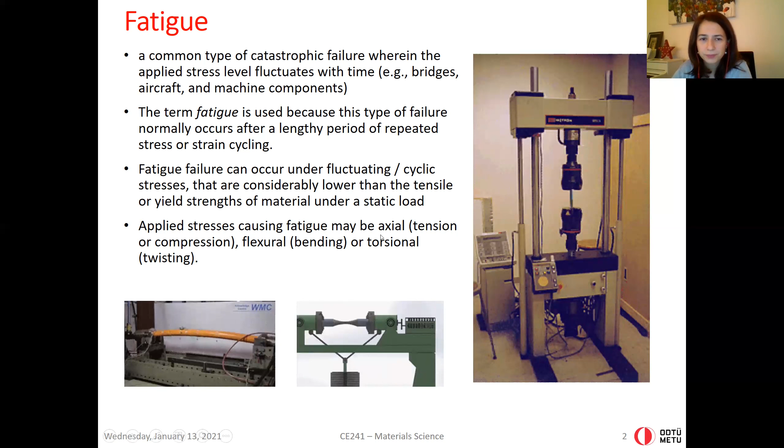The nature of fatigue failure is also very important. Fatigue failure is actually brittle-like; relatively little plastic deformation occurs, even in normally ductile materials. This means sudden and catastrophic failure, which is something we for sure don't want in civil engineering structures. It causes 90% of all failures of metallic structures. Polymers and ceramics, except for glasses, are also susceptible to this type of failure.

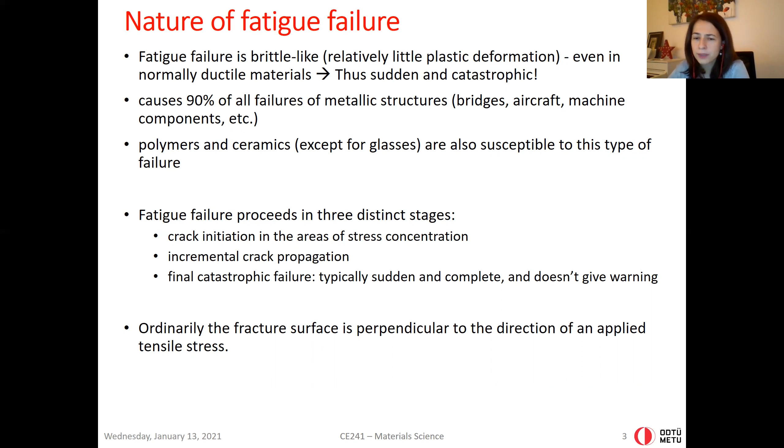Fatigue failure proceeds in three distinct stages. The first stage is crack initiation in the areas of stress concentration. The second stage is propagation of this crack. The final stage is catastrophic failure, which is sudden and complete and gives no warning. Ordinarily, the fracture surface is perpendicular to the direction of the applied tensile stress.

And random stress is the last one. Basically, it is just random.

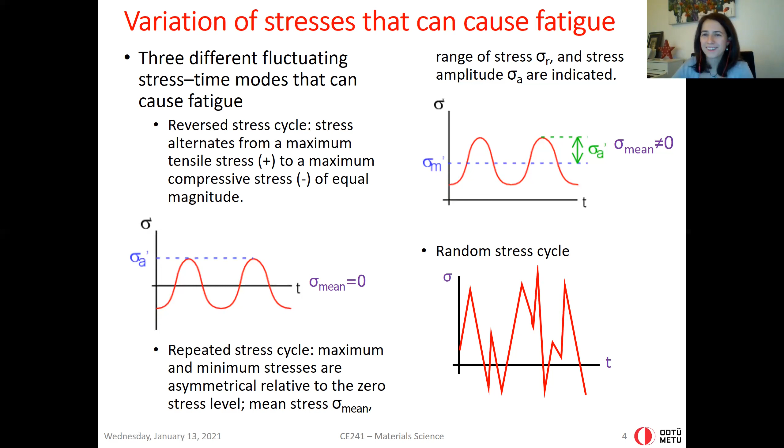When we talk about cyclic stresses, repeated stress and reverse stress, the main difference is the mean. Cyclic stresses can be characterized by maximum, minimum, and mean stresses, and the range of stress and the stress ratio. The range is max minus min. Mean is max plus min divided by 2. And R is the stress ratio of stress min to stress max. For reverse stresses, R is minus 1.

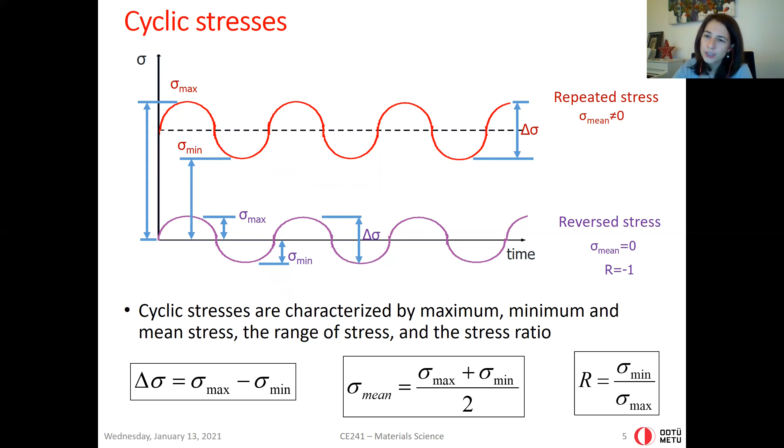We carry out fatigue tests to determine fatigue performance of our materials. These tests are carried out to determine the stresses that can be applied over a specific number of repetitions, or the life under a specified stress level.

The general procedure of a fatigue test is like this: you first subject your specimen to a cycling stress at a relatively large maximum amplitude, usually around two-thirds of the static tensile strength, and count the number of cycles to failure. Then you repeat on other specimens at progressively decreasing maximum amplitudes, and finally plot the data as stress amplitude versus the logarithm of number of repetitions. The stress values are normally stress amplitudes, but sometimes max or min values are also plotted.

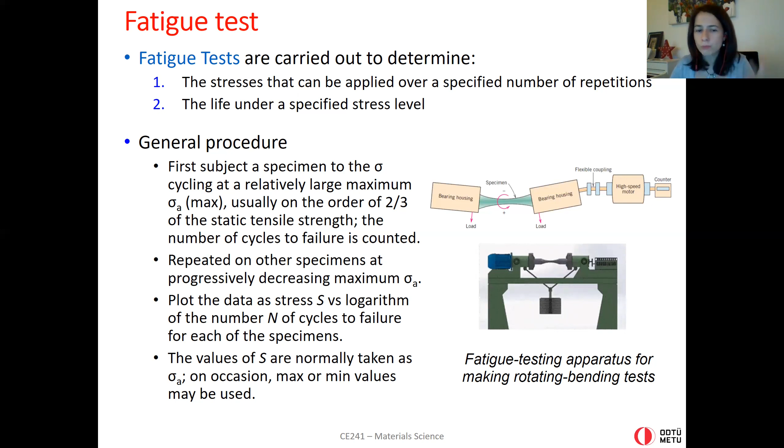In a fatigue test, stress versus number of load repetitions is plotted to obtain S-N curves, also known as Wöhler curves. There are two distinct types of S-N curves: with a fatigue limit, also known as endurance limit, or without an endurance limit.

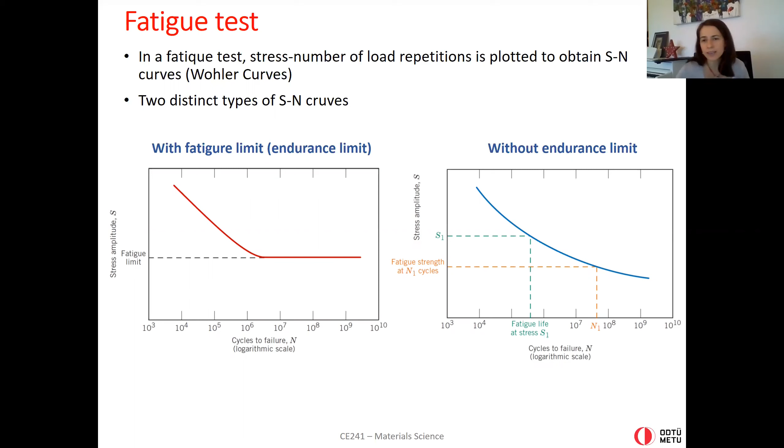Let's go through the curves without an endurance limit first. A material that does not display a fatigue limit is very common. In most alloys, the stress decreases continuously with number of repetitions. In these cases, fatigue properties are generally described by fatigue strength, the stress at which fracture occurs after a specified number of cycles, and fatigue life, the number of cycles to fail at a specified stress level.

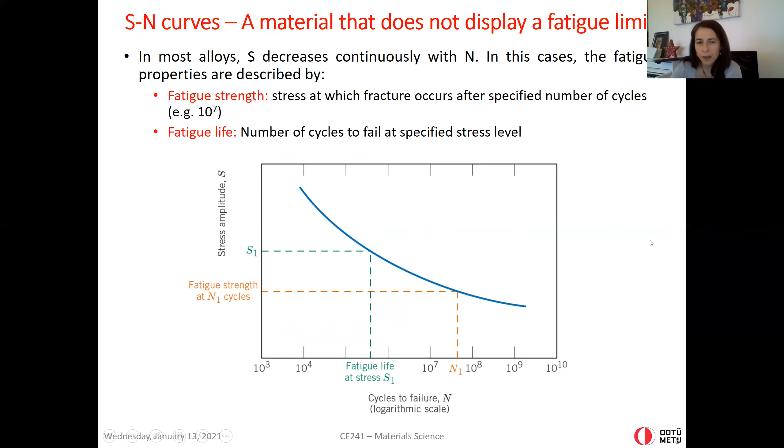But some materials display a fatigue limit. It is the maximum stress amplitude below which the material never fails, no matter how large the number of cycles is. Fatigue limit occurs for some ferrous and titanium alloys. In these cases, the S-N curve becomes horizontal at large numbers of repetitions. For most steels, this value is around 35% to 60%. Fatigue limit is basically the maximum stress that can be applied repeatedly an infinite number of times.

To briefly summarize, here on this graph you can see the horizontal portion at large N. This is your fatigue limit.

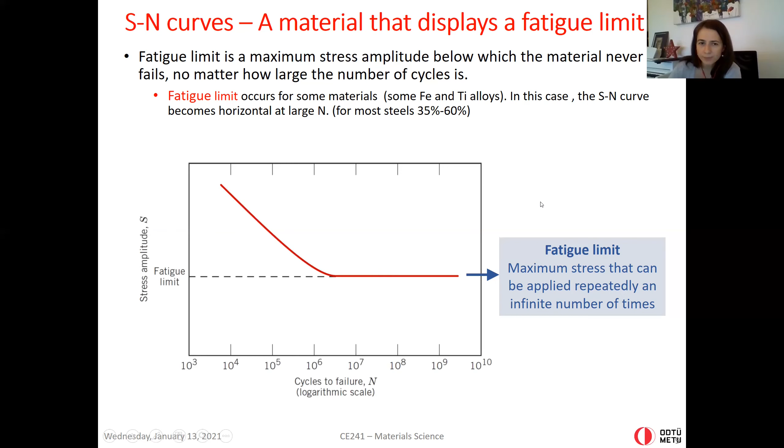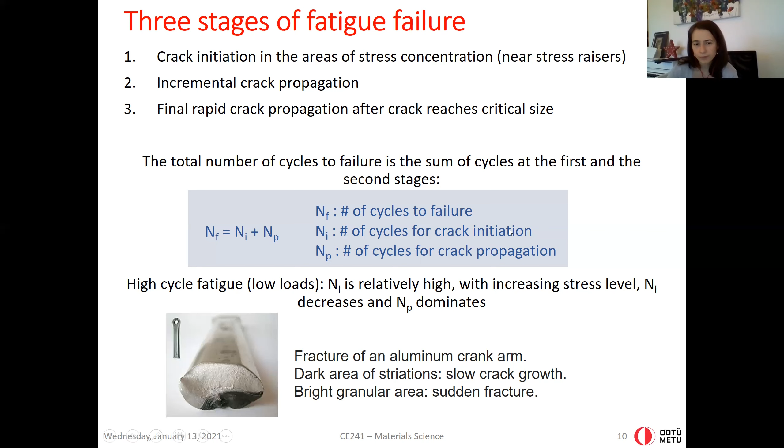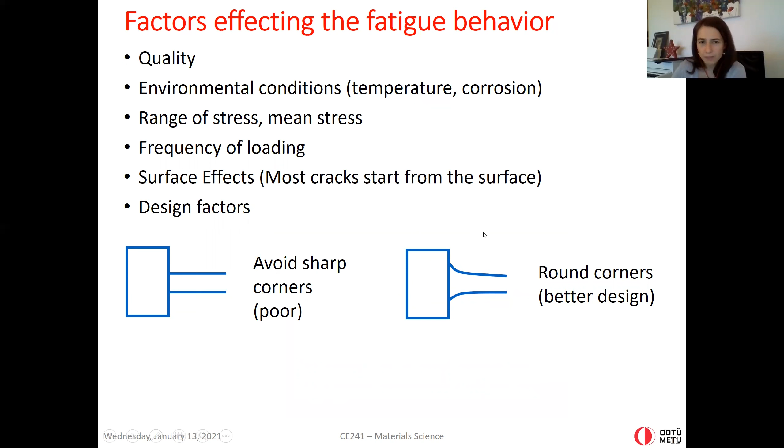There are various factors affecting the fatigue behavior: the quality of your material, environmental conditions including temperature and corrosion, range of stress, mean stress, and frequency of loading. Surface effects are also critical, as most cracks start from the surface. You also need good design, avoiding sharp corners if you are worried about fatigue—round corners are much better for fatigue resistance. Let's talk about two main factors that affect fatigue behavior.

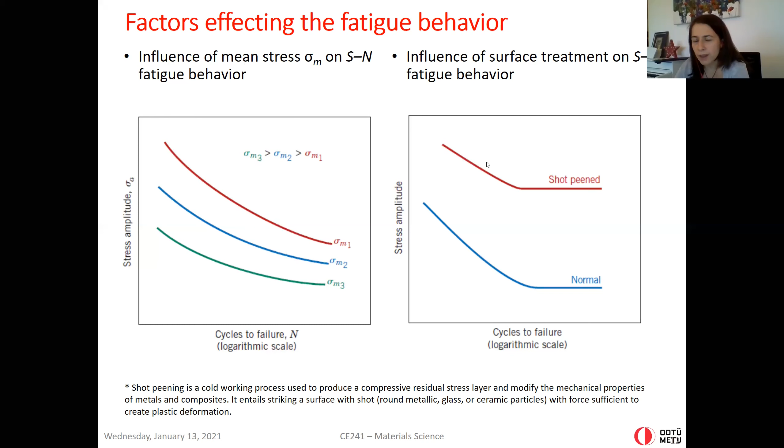The second curve shows two different surfaces, as surface condition is very critical for fatigue behavior—cracks most of the time start from the surface. The red one is shot peened, and the blue one is a regular surface. Shot peening is a cold working process used to produce a compressive residual stress layer and modify the mechanical properties of metals and composites. It involves striking the surface with shot—round metallic, glass, or ceramic particles—with enough force to create plastic deformation, so the surface becomes a little rougher. As you see, when you improve the surface, you significantly improve the fatigue performance.

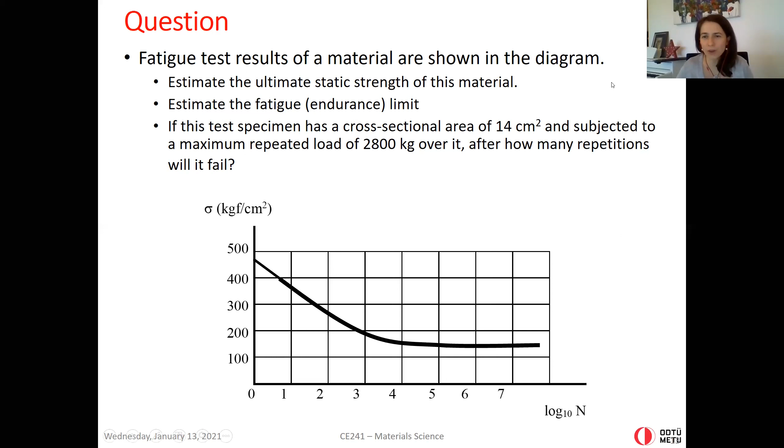Okay, the first one is easy: at 0 repetitions, it's 450 kilogram force per centimeter square. For the fatigue endurance limit, we have to approximate—it's around 150 kilogram force from the graph. Let me open this and draw it. So this is our fatigue limit.

The last part: the cross-sectional area was 14 centimeters square, our load was 2800, so how many repetitions later will it fail? First, calculate your stress: 2800 divided by 14 is 200 kilogram force per centimeter square. So log n equals 2.7 if you check—of course, from this graph you cannot read it very precisely, so it's roughly 2.7-ish. With log n equal to 2.7, you solve for n as around 500.

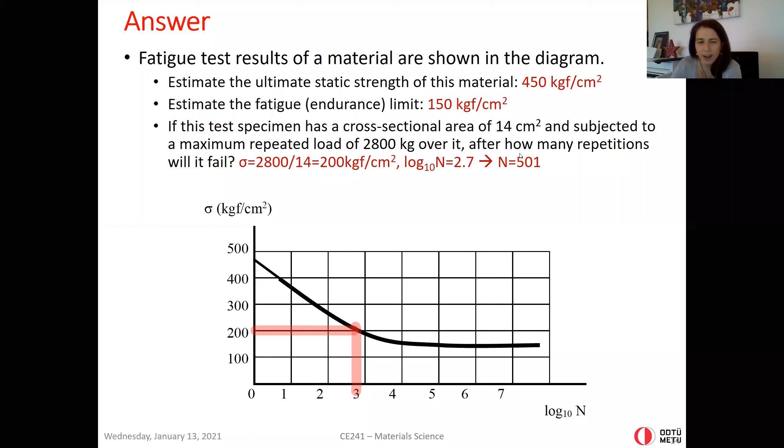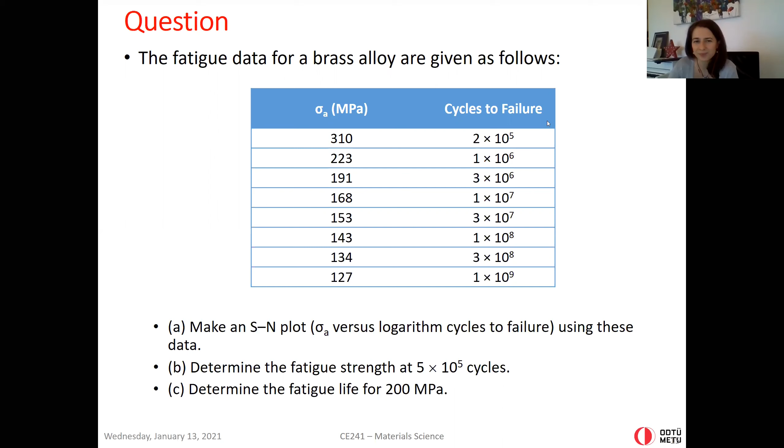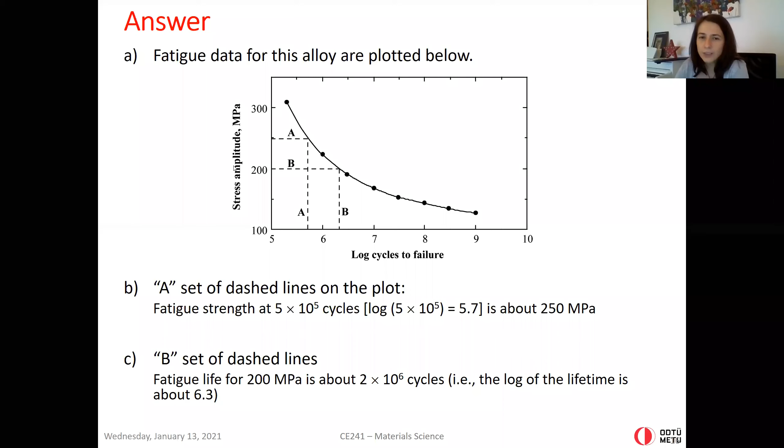Let's solve another question. Again we have our stress amplitude and cycles to failure data. Please plot the SN curve. What is the fatigue limit for this alloy? Can you determine the fatigue lifetimes at stress amplitudes of 230 and 175 megapascals? Can you estimate the fatigue strengths at 2×10⁵ and 6×10⁶ cycles? Please pause the video before continuing.

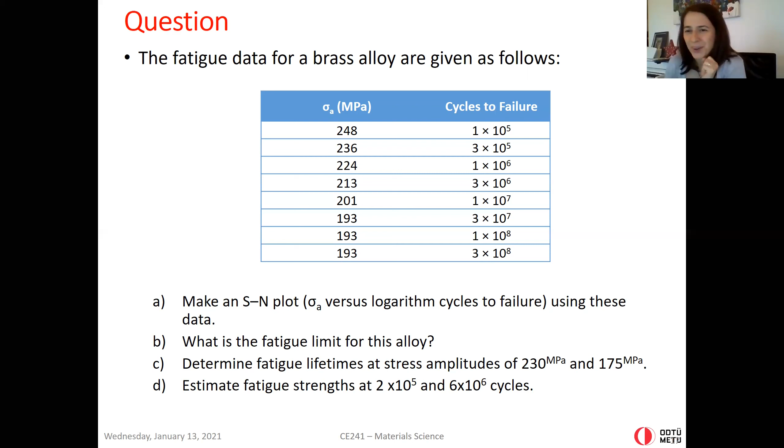I hope you got this one right. Here is our plot. Again, this one is not a logarithmic graph, but you know how to convert it. The fatigue limit is the stress level at which the curve becomes horizontal. Here we already know it's 193 from the data—this is the part where it gets horizontal, so here is our fatigue limit, where the curve becomes horizontal.

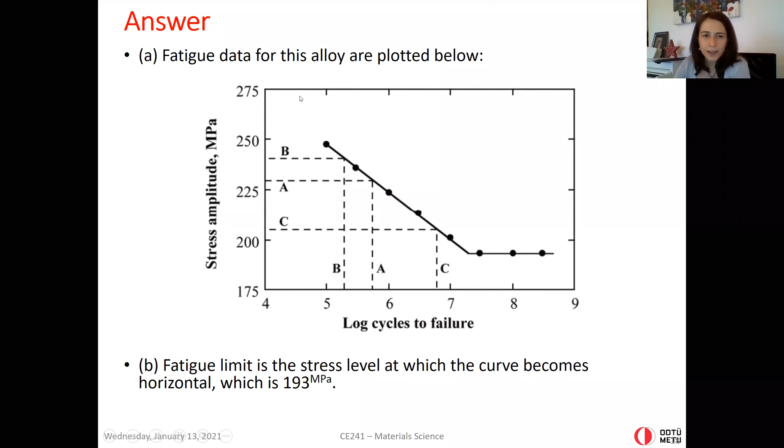Part C asks for the fatigue lifetime at stress 230 and 175. Let's find the fatigue lifetime at 230. I go down to 230, and this is roughly 5.7, which means 10 to the power of 5.7 is roughly 5 times 10 to the 5 cycles.

Now let's check 175. This is actually below the fatigue limit, which was 193. So it is basically infinite, it never fails.

Part D asks for fatigue strength at 2 times 10 to the 5. Let me clear these lines. 2 times 10 to the 5 is log n equals 5.3. So I'm here at 5.3, and it's roughly speaking 240.

It also asks for fatigue strength at 6 times 10 to the 6. Taking the log, that's 6.78. So it's here, I go left, and it is around 205. You can also use logarithmic paper, but I wanted to show how to use the same data in a different way.

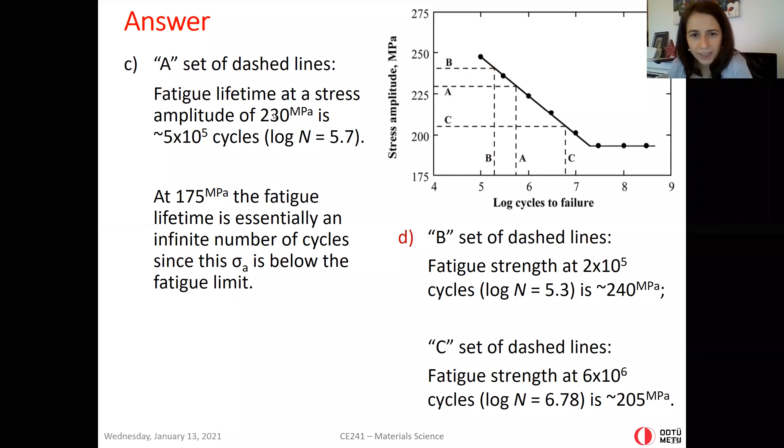Let's continue with a different question. What would I do if I use 2 different stresses, stress 1 and stress 2?

We have a beam subjected to reversed cycles at stress 200 megapascal, and we do 5 times 10 to the 2 cycles. How many additional cycles can the beam withstand at 150 megapascal? I also wrote the N values for 200 and 150 megapascals, and included the graph so you can read them too. For N at 200 megapascal it's 1.65 times 10 to the 3, and at 150 it's 1.05 times 10 to the 4.

To solve this, use Miner's rule for fatigue under varying stress: the number of cycles gone through at the first stress divided by its lifetime, plus the number of cycles at the second stress divided by its lifetime, should add up to 1. So 5 times 10 to the 2 divided by 1.65 times 10 to the 3, this is the 200 megapascal portion, plus number of cycles under 150 divided by lifetime under 150 megapascal, which is 1.05 times 10 to the 4. This should add up to 1.

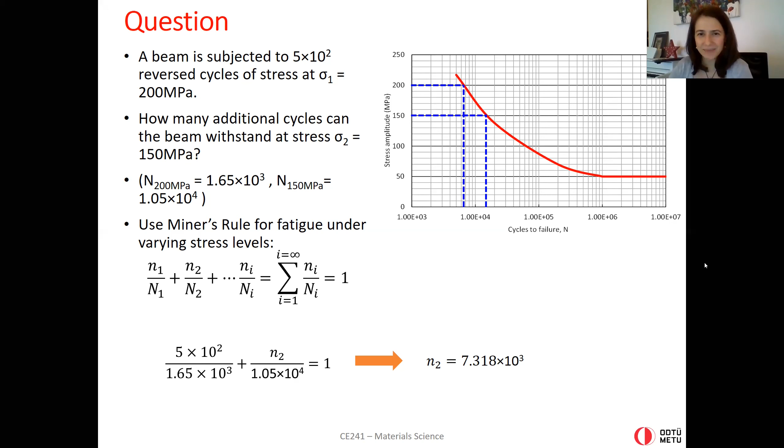Now a different question. We have 3 identical fatigue specimens, A, B, and C, fabricated from a non-ferrous alloy. Each is subjected to one of the maximum-minimum stress cycles listed below, with the same frequency in all three tests. Specimen A goes from 450 to minus 350. Specimen B goes through 400 megapascal to minus 300 megapascal. Specimen C goes through plus minus 340. Can you rank the lifetimes of these 3 specimens from longest to shortest, and justify this ranking using an SN plot?

Please pause the video before going on.

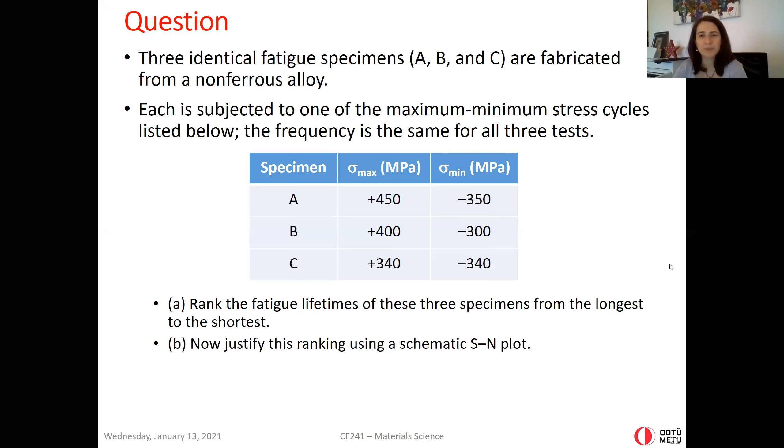To solve this, first we need to compute the mean stress and stress amplitude for each specimen. Mean stress is the average, so for A, B, and C it is calculated as 50, 50, and 0 respectively. We also need the stress amplitude, which is max minus min divided by 2. For A it's 400 megapascal, for B it's 350 megapascal, and for C it's 340 megapascal. Just looking at these, I can clearly say C is greater than B, which is greater than A.

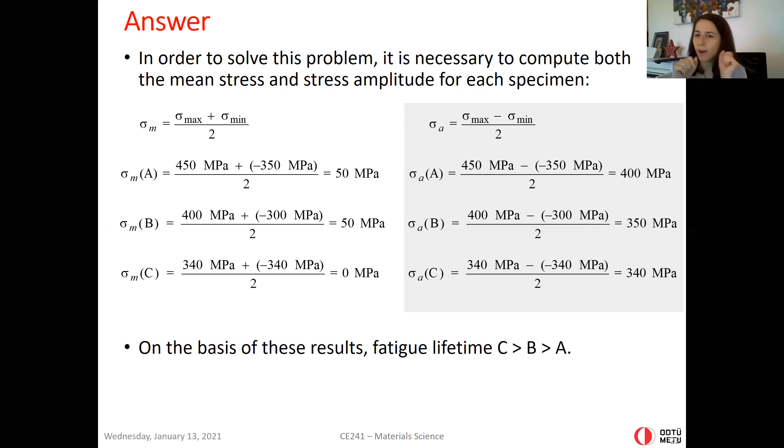Let's go through them on a graph. Here we have C, A, and B. The mean stress for sample C is 0, so it has a lower mean stress, meaning it can have a longer lifetime. For specimens A and B, the mean stress is 50 megapascal, meaning they will for sure have a shorter lifetime. So C wins. Plus, the amplitude calculated for C is 340 megapascal, which is also lower, so for sure C will have a longer lifetime.

Here the mean stress is 0, and this shows schematically what happens if you increase the mean stress. This is 340, here we have 350, and here we have 400. So this is A, which will have the shortest lifetime, then B, and finally C.